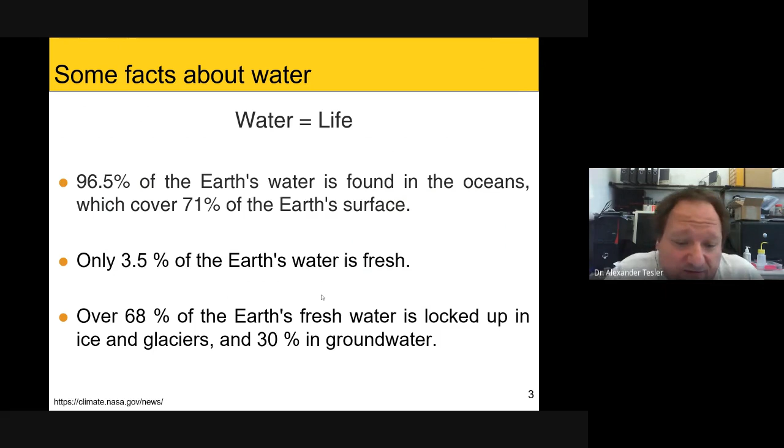If we speak about Europe, even now, water stress affects 20% of European territory and 30% of the European population annually. Countries in Southern Europe suffer from droughts, which cause enormous damage and expenses.

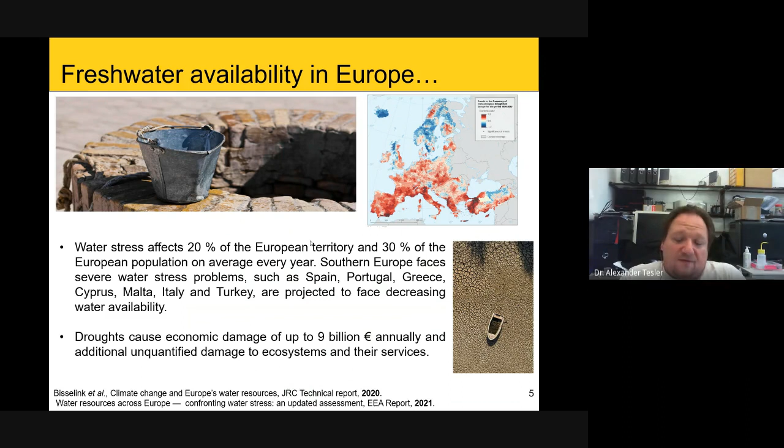So, in addition to the problems that we have with water, we have another problem known as chemical or biological fouling. What is chemical or biological fouling? It is just an accumulation of unwanted materials on a surface which deteriorates the functionality of devices, materials, surfaces, and so on.

Here you can see several examples like fog, ice, crushing of concrete through freeze-thaw cycles, corrosion and sedimentation in pipes, fungi fouling, which almost everyone has in their apartment on the walls every winter, biofouling of membranes for desalination of water and on ship hulls, and finally bacterial fouling on medical devices like catheters and implants.

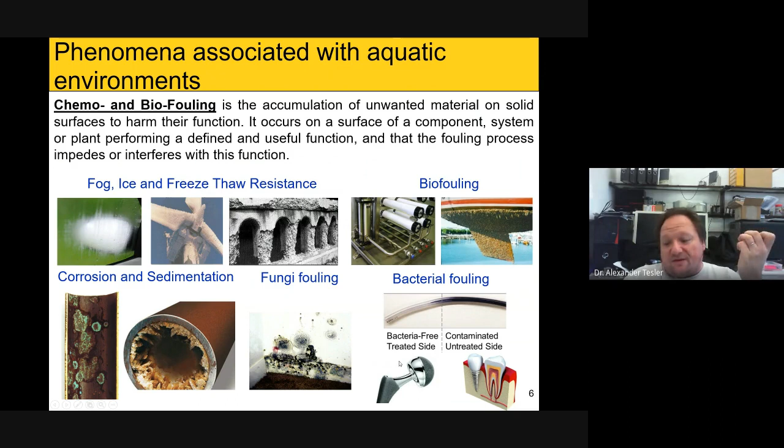If we think only about the shipping industry, it was shown 10 years ago that the amount of pollution just from shipping is huge in terms of carbon dioxide, sulfur dioxide, NOx, and particulate matter. If we take data from 2007 to 2012, about 1 gigaton of carbon dioxide was emitted annually, which is about 3.5% of annual global carbon dioxide emissions. And this number is growing all the time.

On the other hand, oceans and seas are in constant movement, so they can be used as a wonderful renewable energy source. As was calculated, the beach area of the United States can cover most of its energy requirements. However, fouling problems in many cases prevent using such a large amount of energy in real applications. From that point of view, superhydrophobic surfaces can reduce the contact between solid surfaces and surrounding liquids.

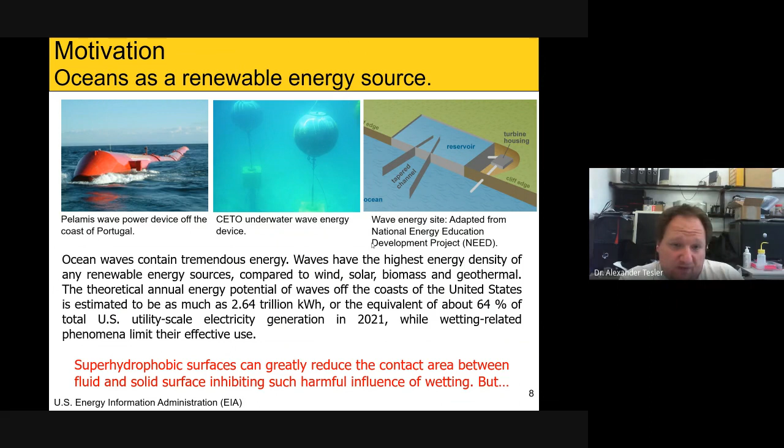However, they suffer from several problems, and this will be my talk for today. First of all, I will briefly introduce you to superhydrophobic or aerophilic surfaces, how to make these surfaces ultra slippery, and I will show you several applications we have, and then summarize this talk.

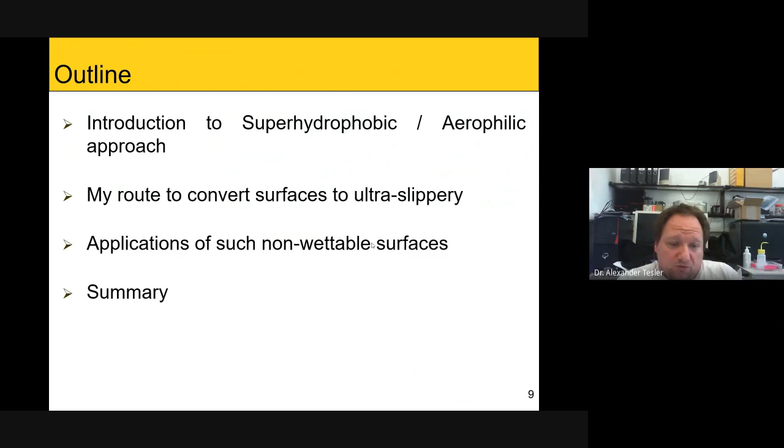So, just a brief reminder about wetting of surfaces. More than 200 years ago, Young displayed the relation between three different interfacial energies, solid-vapor, liquid-vapor, and solid-liquid, and derived this equation, known as the Young equation, for atomically smooth, chemically homogeneous surfaces. Now, this is a purely theoretical value because we don't know how to produce surfaces with such homogeneity or chemical homogeneity.

So, almost 150 years later, Wenzel introduced a more realistic value of roughness to this equation, which is R, and displayed it for the state when the droplet stays round on the surface, yet the droplet follows the morphology of the solid, and this is why it is pinned to the surface. So this state, also called pinning state or homogeneous state, is known as the Wenzel state, and the only difference is the introduction of this roughness parameter.

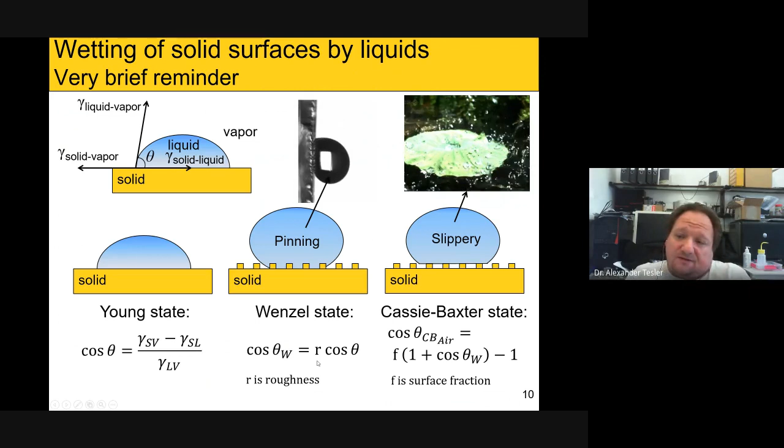10 years later, Cassie and Baxter introduced an additional correction to this model when they introduced the surface fraction coefficient, which displays how much of the surface is actually in touch with the solid substrate. And of course, the most famous example of these surfaces is the lotus leaf. So here, the droplet experiences heterogeneous wetting when it is partially in contact with the solid and partially still in contact with air.

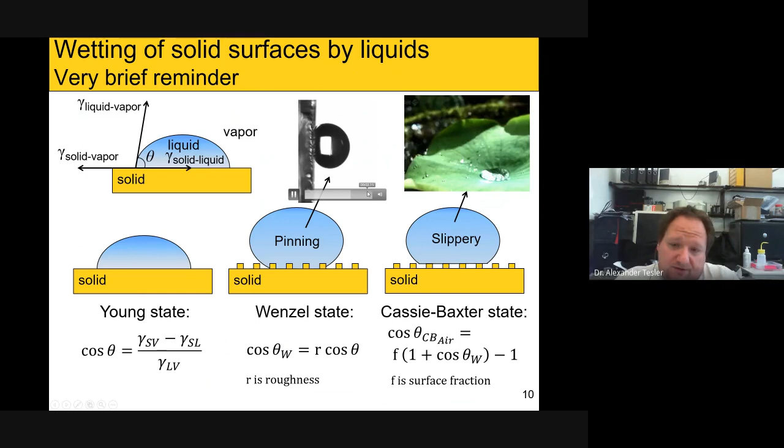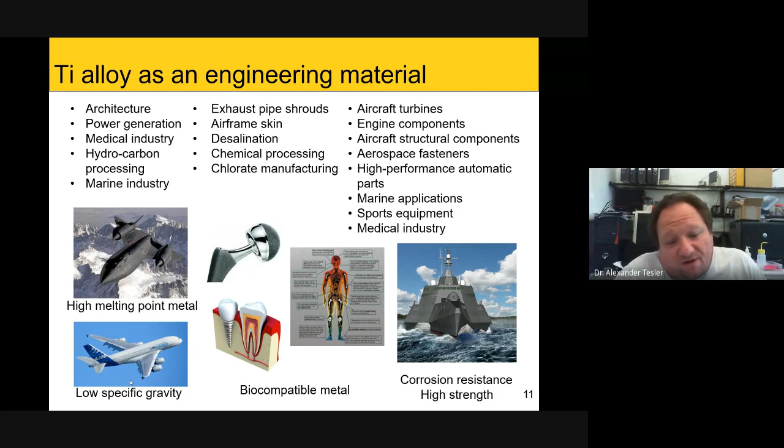So we work on titanium as a structural material. Why titanium? Because titanium is a high melting point and low specific gravity material, so it's very light, but it has good corrosion resistance and high strength. And also it is biocompatible, so it's used as the main material in almost all implants that we can put into the human body. So all these applications use quite a lot of titanium, among which this is Airbus, now using tons of titanium to build their aircraft. So this is why it is an interesting material.

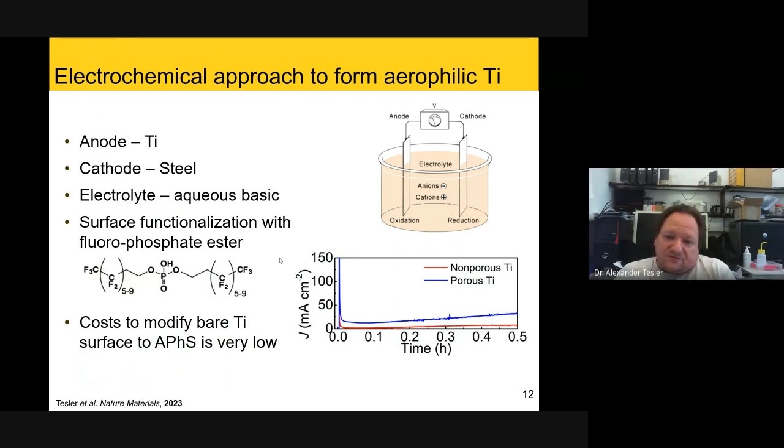Since we are an electrochemical laboratory, our approach was to use a relatively simple approach to make the surface rough, without any lithography or complex processes. Now, when we talk about electrochemistry, it's a very simple cell. It consists of just two electrodes. Titanium is the anode, steel is the cathode, and the basic electrolyte in between. And then after formation of the rough surface, we just functionalize it with a fluorophosphate ester molecule, like you see here. So in general, modification of bare titanium into aerophilic titanium is very, very cheap.

So how do we know that we produce a rough surface and not a dense surface? We follow simply by current density measurements, and we see that with time it is increasing. So it means that more and more metallic surface is exposed to the electrochemical reaction. In the case of a dense non-porous film, it will stay more or less similar to the initial.

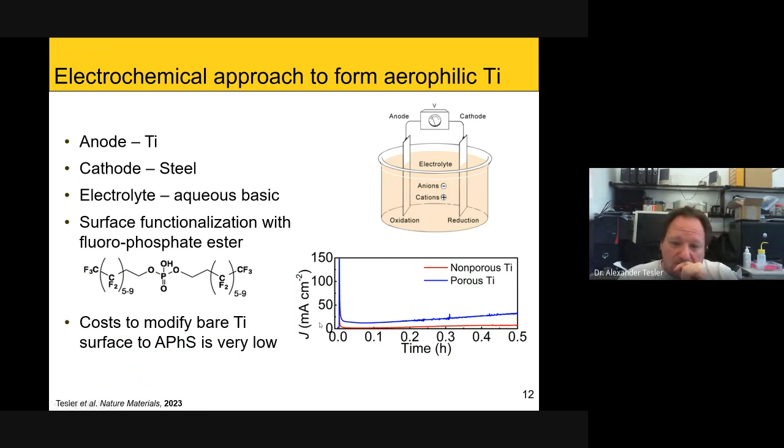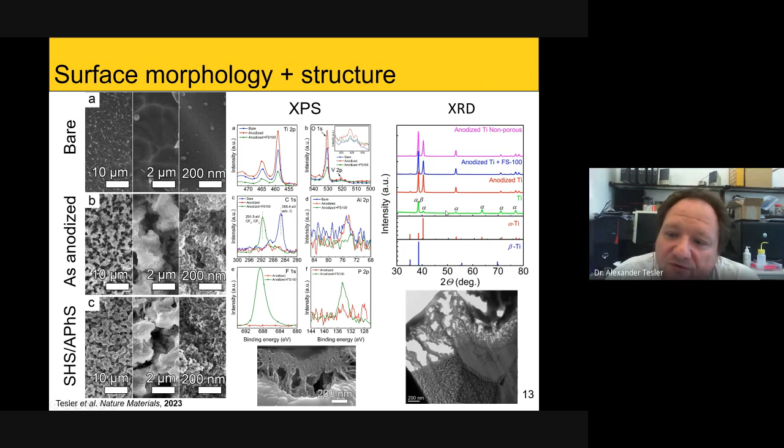XPS clearly shows formation of a self-assembled monolayer of fluorinated surfactant on the surface, for example, with shifts of carbon to the formation of CF2, CF3 bonds, appearance of fluorine, phosphorus, and reduction in the signals of titanium and oxygen. Here are cross-sectional images of the surface, SEM and TEM images. And from XRD, we see that this rough oxide layer is actually amorphous because we do not see any crystalline phases like anatase or rutile, and we only see alpha and beta phases from the bare titanium alloy.

Now, after functionalization, we had a problem. So here, in the top movie, you see that water does not stick to the surface. And then we cannot do standard goniometric measurements such as contact angle, which is maximal in this case. So if a droplet does not touch the surface, when we try to land it on the surface, it just rolls off very quickly. So what we can do is measure contact angle hysteresis like here, which is quite negligible in this case. And then we need to use other techniques to characterize the surface.

Now, in collaboration with Professor Ras from Aalto University, we used what's called a micropipette force sensor. This sensor measures direct friction force on the surface, and the droplet is actually sitting on the capillary. From these measurements and also from oscillating drop tribology, which is another technique to measure friction force, we can derive this plot, which characterizes state-of-the-art superhydrophobic surfaces developed in recent years.

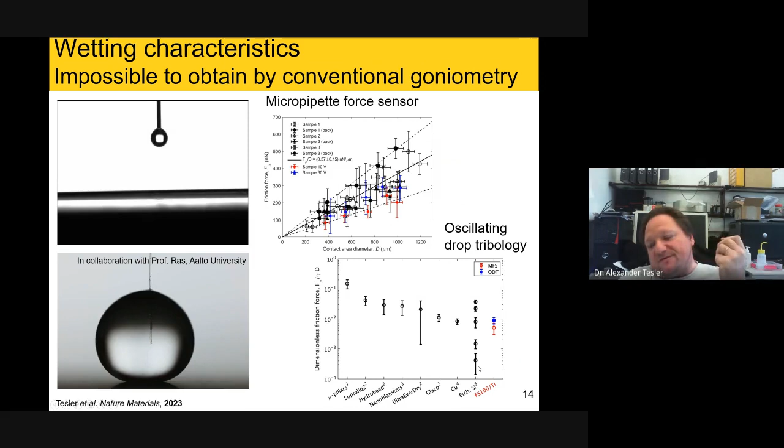And among all engineeringly available systems, our surfaces are the most slippery one. So there is one more slippery system, which is etched silicon or black silicon. But engineeringly, it is not relevant because it's not mechanically stable. On the other hand, our system is mechanically stable.

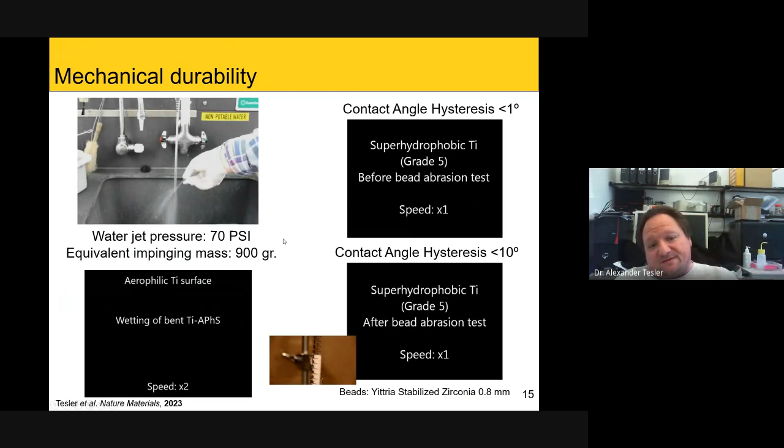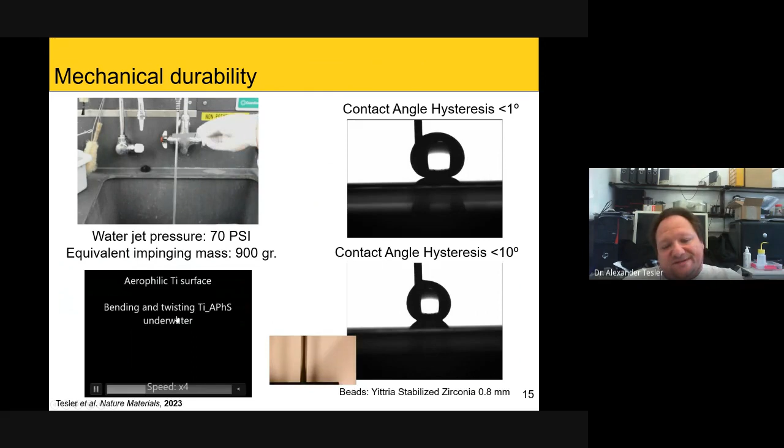So here you see several movies. Here it is water jet of 70 psi, which is equivalent to impinging mass of 900 grams, almost 1 kilogram, and surface surviving it easily. Here you see bending, twisting of these surfaces underwater, and they are still reflective, meaning that they preserve their stability, wetting stability, even when it's bended significantly or twisted or whatever.

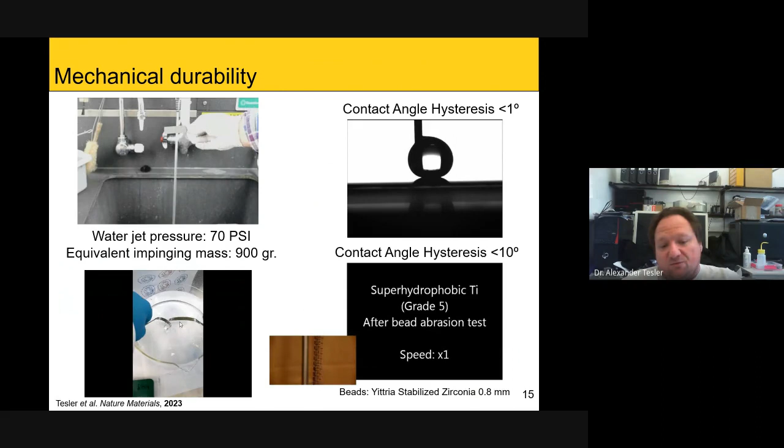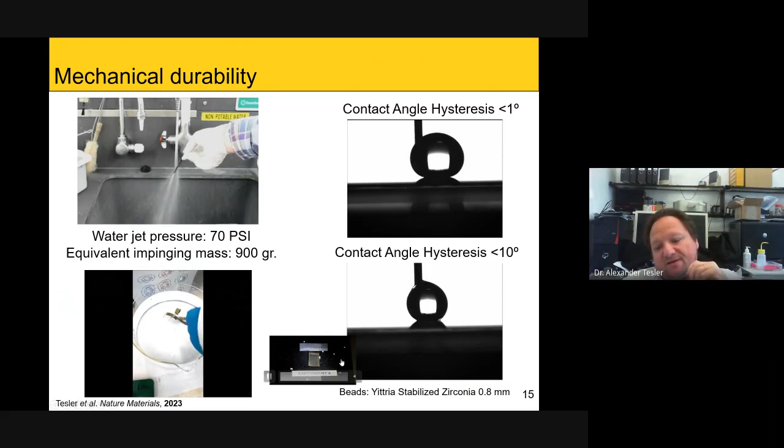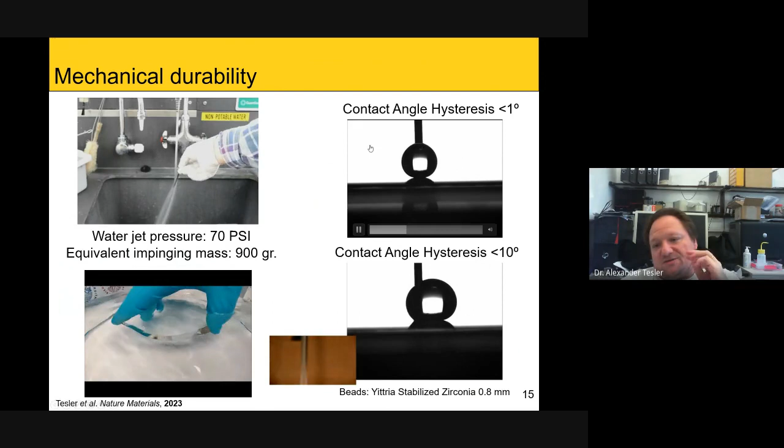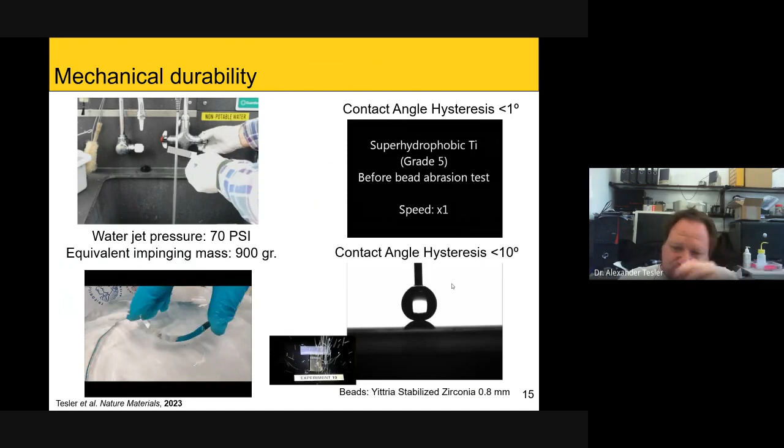It also survives beads of tens of thousands heavy particles like here, and the contact angle hysteresis after this experiment was still lower than 10 degrees. So here you can see hysteresis before the experiment and here after the experiment. So we still experienced low adhesion from one side, and the hysteresis again was well below 10 degrees.

And so far so good, everything is nice, but now I want to introduce you several concepts that were actually shown in the literature. And one of them is, what about stability of this layer of air when you put your samples underwater? And this is a paper in Physical Review Letters from Ulrich Steiner group at Cambridge, where he says that underwater superhydrophobicity is metastable. What does it mean?

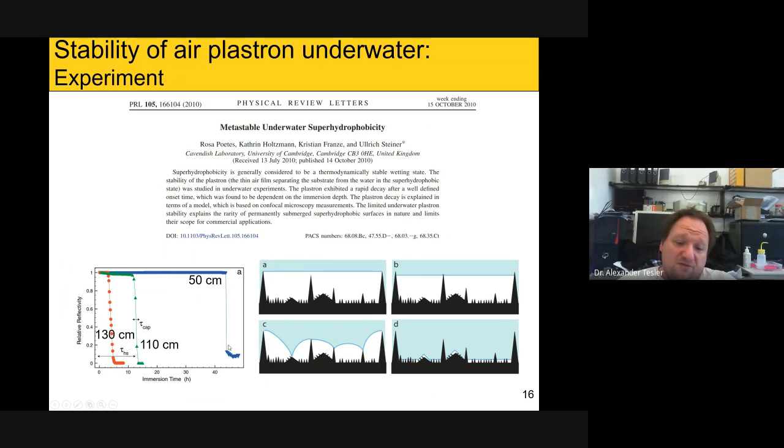It means that if it is metastable, it's susceptible to any small perturbation in any condition, for example, pressure, temperature, and so on, or vibrations. It means that you cannot predict exact longevity of this protective air layer on the surface. And indeed, he did some model and found that his surfaces can survive at 50 centimeters depth for 44 hours.

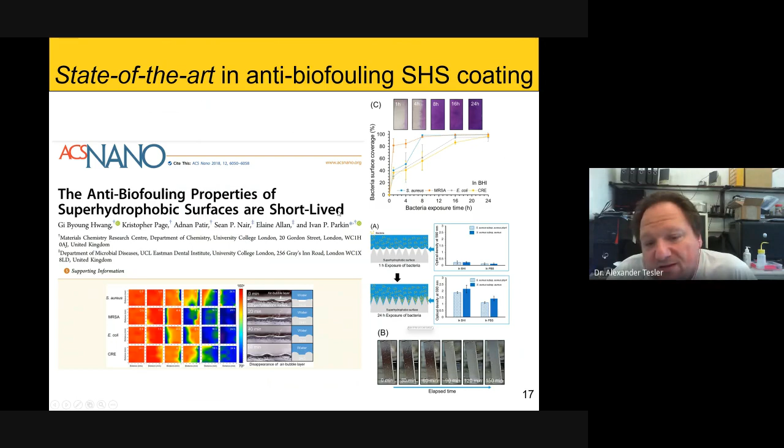This is why another research from Ivan Parkin group at University College London demonstrated that anti-biofouling properties of such superhydrophobic surfaces are short-lived. Why are they short-lived? Because they actually lose this air protective layer within very short time, exposing high surface area surfaces for attachment of bacteria. For example, now you have more surface area, bacteria will attach more easily. And in all the cases, they speak about metastability of this air trapped on the surface.

At the same time, about 20 years ago, Abraham Marmur from Technion theoretically predicted that underwater superhydrophobicity can be feasible. But to say if your system is stable or metastable, we need actually to make much more experiments rather than just simple goniometry, because contact angle hysteresis will not give us this data.

For understanding if a developed superhydrophobic surface is in a stable or in a metastable state, we need to know several parameters. One of them is roughness or roughness factor. So this is dimensionless roughness as described by Wenzel. Solid-liquid area fraction, or how much of our solid surface is actually in touch with surrounding liquid, and also Young contact angle, which is in general a non-measurable value.

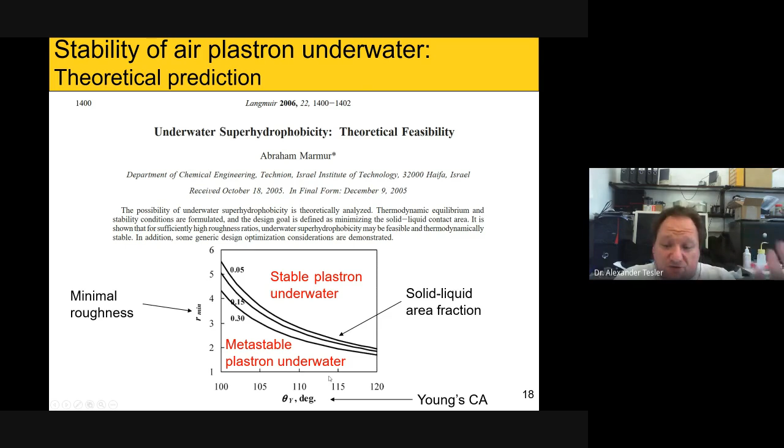And even after that, we cannot measure one single value, meaning that we don't know how to measure this most stable contact angle. But what we know is that it will be within the limiting cases. What are limiting cases? These are advancing and receding contact angle. So advancing angle is when we infuse more and more liquid, and receding when we actually withdraw this liquid. So advancing is the highest apparent contact angle, and receding is the lowest apparent contact angle. And Young contact angle and the most stable contact angle will be somewhere within this range.

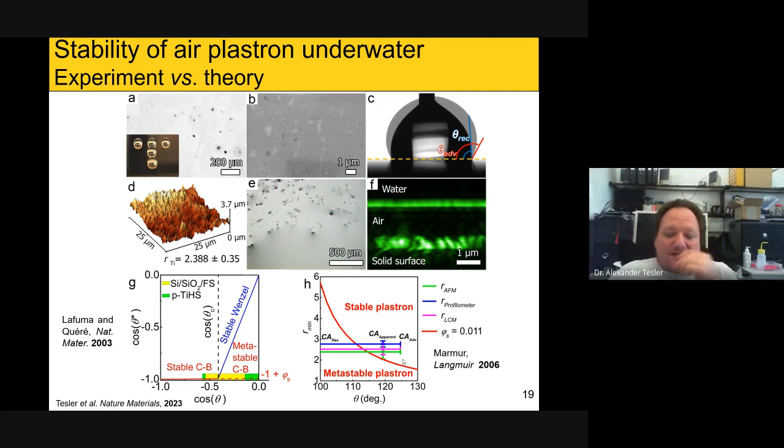So if we are above this solid-liquid area fraction line, we are in stable plastron. If we are below it, it is just metastable plastron. And also here, the model suggests that these surfaces may be in stable plastron conditions. So let's see.

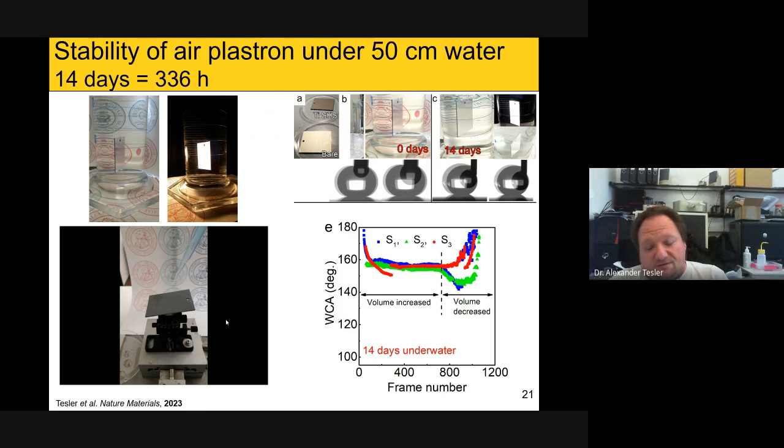Again, let's see how it behaves at 50 centimeters, as Ulrich Steiner showed, for 44 hours. So this sample was 2 weeks at 50 centimeters of water, and when it was removed, it was completely dry. It is still reflective underwater. You can see it here and here, and we do not see any differences in sliding angles or pinning of the droplets on the surface. So it survives at least 336 hours at the same 50 centimeters of water.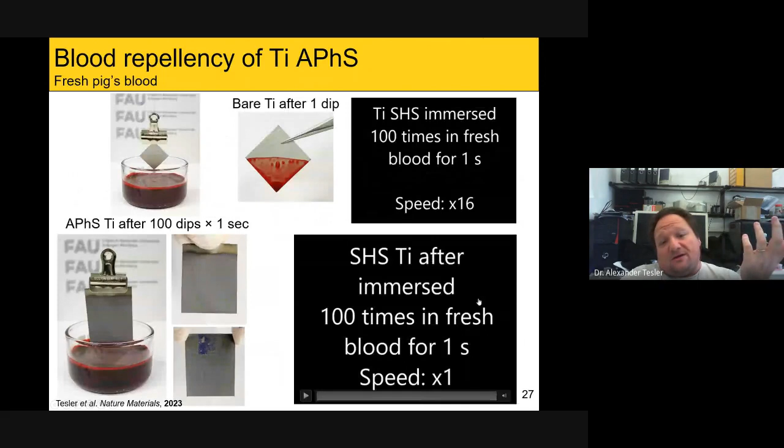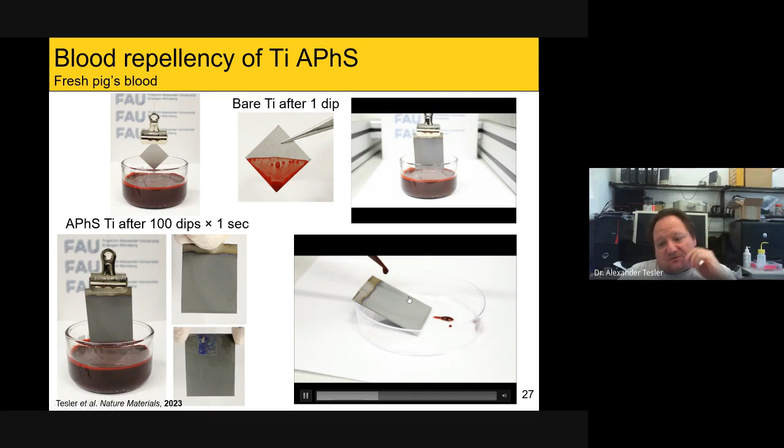What about longevity? So this sample was immersed once. This sample was immersed 100 times for 1 second each. And what we see here, there is no difference between the exposed and unexposed area. So at least 100 times of immersion, it survives.

Later on, we did sequential experiments of immersion for different periods of time. And up to 1 hour, we did not see any attachment of blood to the surface. After 2 hours, we do see some small spots, mainly on the edges, which were removed simply by rinsing in water. And here you can see again this reflectivity of the surface, which is due to the total internal reflectance in the thin air layer.

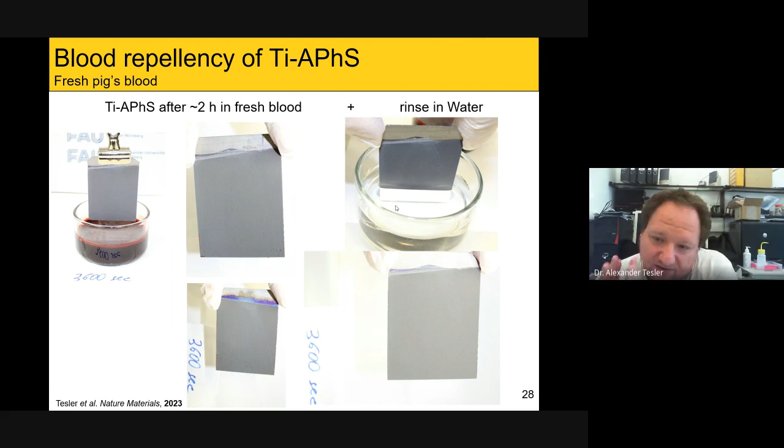Next was biofouling. So bacteria swim in aqueous media. And then we use the sliding window like here to measure kinetics of binding for several hours, what we show here up to 150 minutes. And here are the kinetic results, which means that if we have a bare or rough surface, there is no significant difference in between. But if it is a superhydrophobic or aerophilic surface, the plastron actually prevents bacteria from touching the surface and then settling on it.

So after washing these samples, after about 4 hours, we can measure the amount of firmly attached bacteria. And here we see a significant difference between both bare and superhydrophilic, while actually superhydrophilic behaves even worse than the bare one, indicating that the large surface area it provides indeed makes these samples even more susceptible to bacterial attachment.

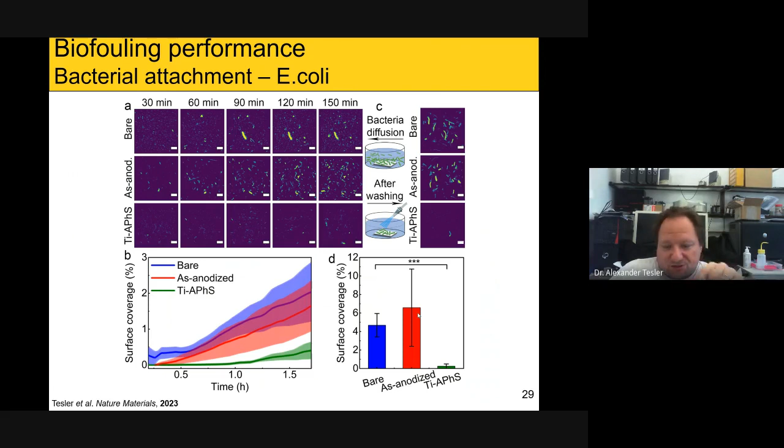Next was to show how it behaves against marine organisms, and in this case we used macrofoulers such as mussels and barnacles. Now, mussels are known to secrete a bioglue like dopamine and attach firmly to the surface. On the other hand, barnacles are known to secrete biocement, which again helps them to glue to the surface, and it is not easy to remove them from the surface.

In the case of mussels, this was the first time a superhydrophobic surface could completely prevent adhesion of mussels to the surface. So none of the mussels that were put on the surface attached. Again, this is because they should sense a solid state, while the air plastron can actually disturb this sensing of touching the surface.

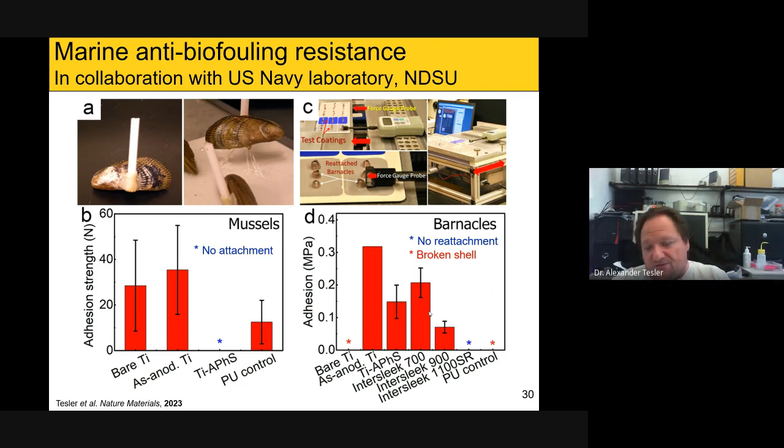On the other hand, barnacles do attach, but the strength of adhesion was much lower than on bare, control, and hydrophilic surfaces, and was smaller or of the same order of magnitude as state-of-the-art anti-biofouling paint. Now, if we take into consideration the price per square meter, paint costs hundreds of euros. Our treatment costs, I believe, less than $1 or €1.

This is why we urgently need advanced characterization techniques to obtain all the required information to make an explicit understanding of whether our plastron is actually in a stable or metastable state. And what are these parameters? First of all, it is roughness, plastron shape, its solid-liquid area fraction, and most stable contact angle.

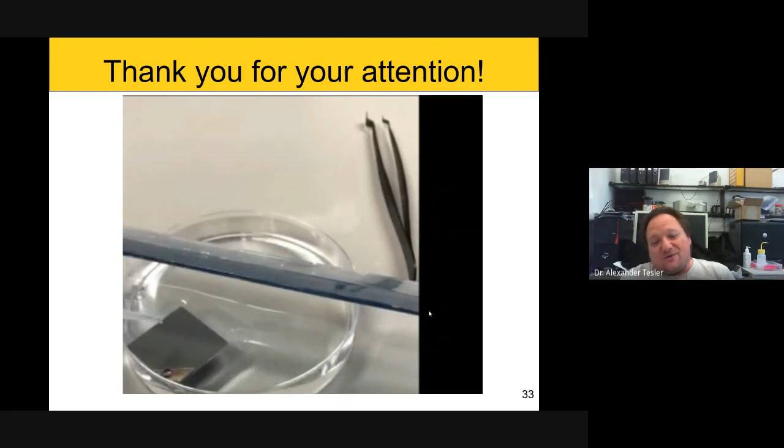And here I want to show you some funny stuff you can do with such surfaces. When this ruler has electrostatic electricity and droplets, you can actually direct movement of droplet in specific direction, or even remove it just by electrostatic electricity, while droplet jumps on the surface and then jumps back to the ruler.